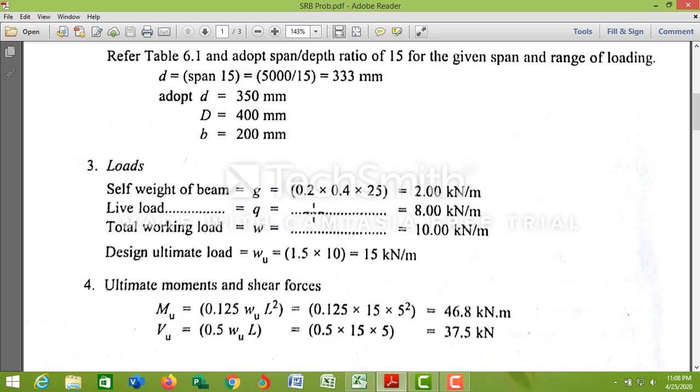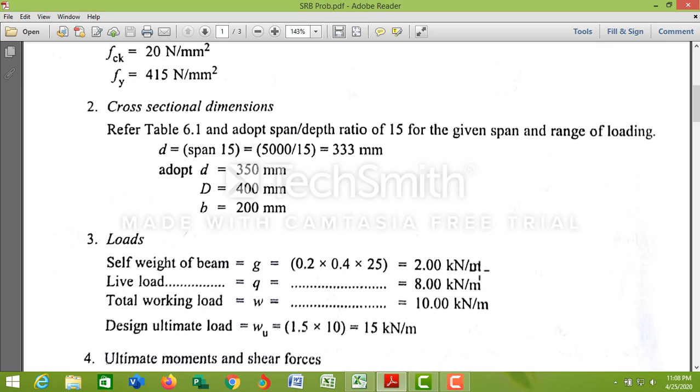After that, second step, loads. You can observe the question here. Loads are given: self weight of beam 2 kilonewton per meter. It is not given in the question, but here is how it is calculated. See, observe. Self weight of beam, how are you going to calculate it? The dimension of beam, 200 millimeter breadth and 400 millimeter depth, multiplied by density of concrete, then you are getting the self weight of beam 2 kilonewton per meter. Next, live load is given, so you can give that live load.

See here, for calculating self weight, you can feed the program, or you can feed the formula. See, like this. You can just double click here, it will appear equal. Every time you are going to feed a formula, you must type the equal. After that you can type your formula.

Okay, here see, observe, the breadth is 200 millimeter. C4 is width of beam, 200 millimeter. Why divided by 1000? Because it is in terms of millimeter, so I want to convert to meter. So here I put divided by 1000, multiply by C5, which is the depth of beam. The input data is 400 millimeter, so you should convert to meter. So divided by 1000, multiply by 25. 25 is the density of concrete. So the answer is 2 kilonewton per meter.

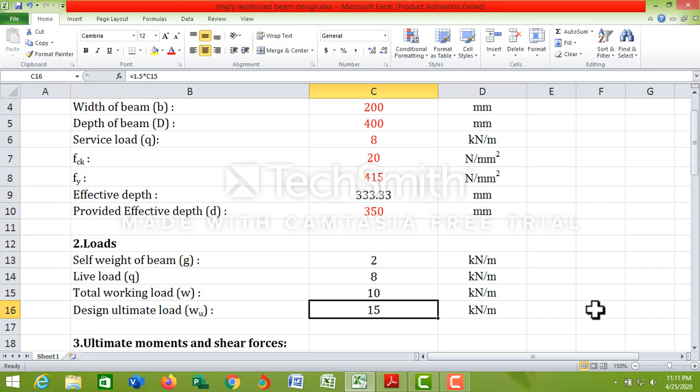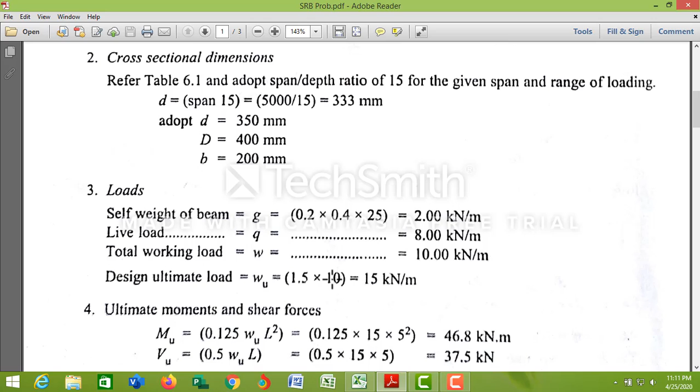Next, design ultimate load. How are you going to calculate design ultimate load? By manual method, design ultimate load Wu equals 1.5 times total working load. That means 1.5 multiply 10. How are you going to give it in the Excel sheet? See, equal 1.5. Here star is nothing but multiplication. In the Excel sheet, when you are going to multiply, you should give the star. Finally, we calculated design ultimate load Wu 15 kilonewton per meter.

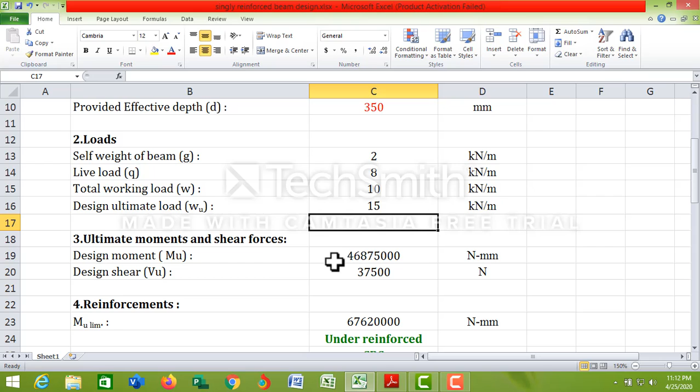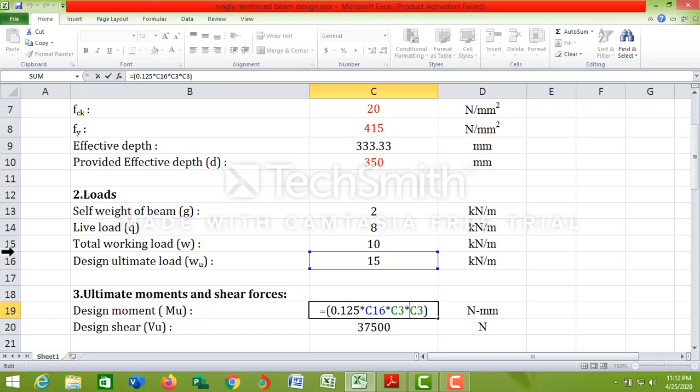Next, ultimate moments and shear forces. How are we going to calculate Mu, ultimate moment? The formula is 0.125 Wu L square. How are we going to feed it in the Excel sheet? See, equal 0.125 into C16, or you can double click here, it will appear. Wu is C16. Wu into C3; the formula is WL square. L means effective span of beam, L square, so you can give power 2. It is very simple. As per the formula, you should give the formula.

Next, design shear. What is the formula for design shear? Vu equals 0.5 Wu L. The formula is 0.5 times Wu into L. It's a very simple formula. So you can just double click: 0.5, C16 is the Wu, into L. L is C3.

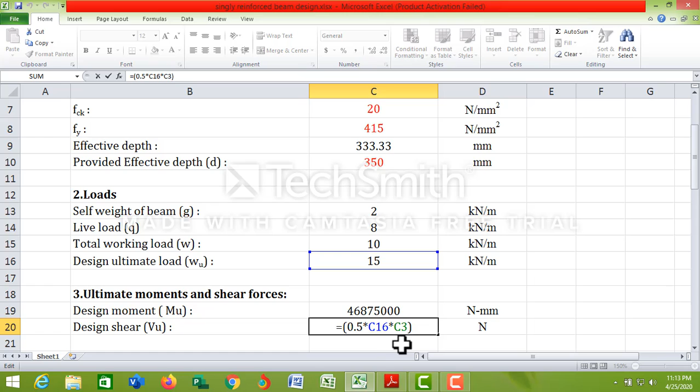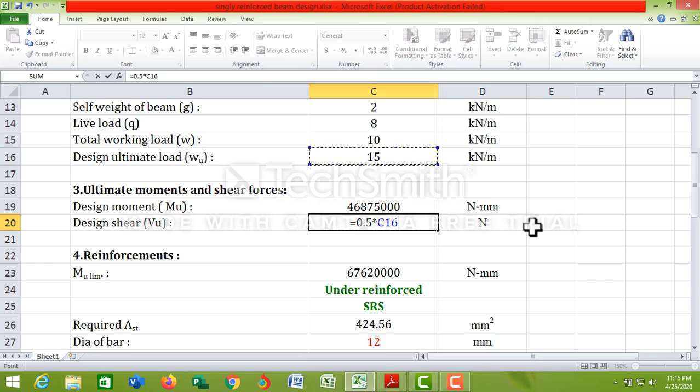Here I will show one demo of how I type this one. See, I will delete this formula. You can just type like this, equal. What is the formula? Vu equals 0.5, into is nothing but star here. Wu, the design ultimate load, we already calculated. You can directly call it, just click here, the software will automatically take it, and after that you put the star according to the formula 0.5 into Wu into L.

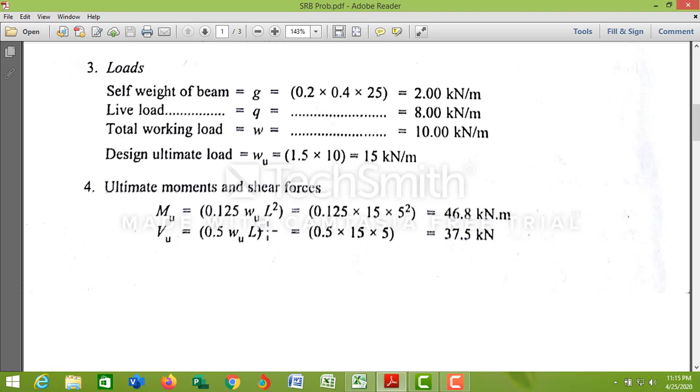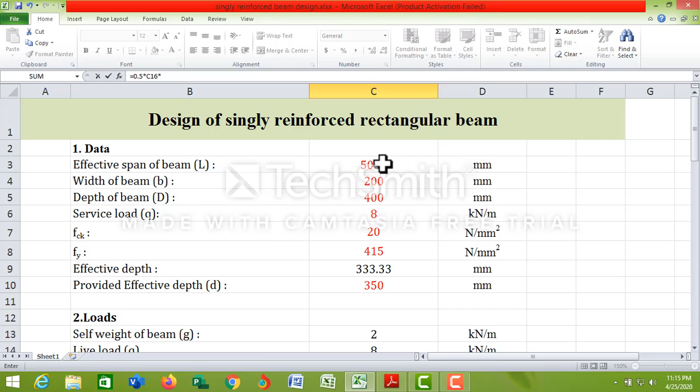L we already have in the given data. You can directly call it. Just keep your cursor here and click on whatever column is required. Click on this, it will take it automatically. Then press enter. The answer will come automatically. Okay, it is very simple.